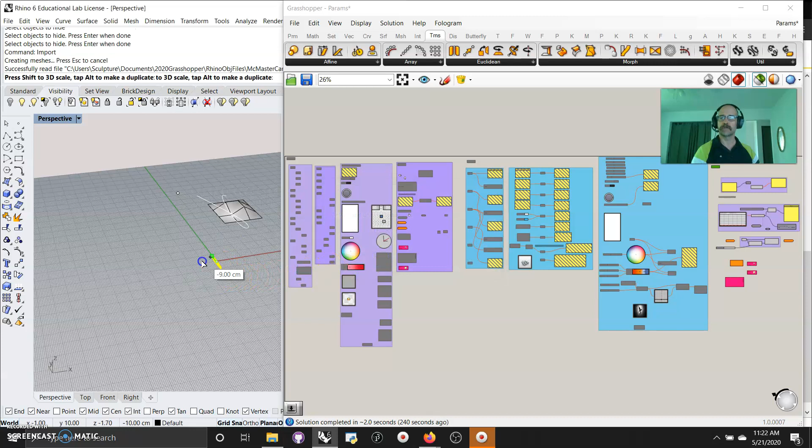Go to product details, scroll down to the bottom, save as a 3D step file, and there you go. It's in your downloads. Once you're done, jump into Rhino, go into import, and import whatever you feel like. I could grab that hex nut and load it in, and it should pop in here. Oh, it's a big one - hopefully no issues with it. Yeah, it's a tiny one. I'll have to stretch and make it bigger, and there we go.

Got a great piece of geometry that's made for you. You don't have to make it yourself. It's going to save you tons of time. If you haven't seen that tip, I don't know where you've been, because it's been pretty cool.

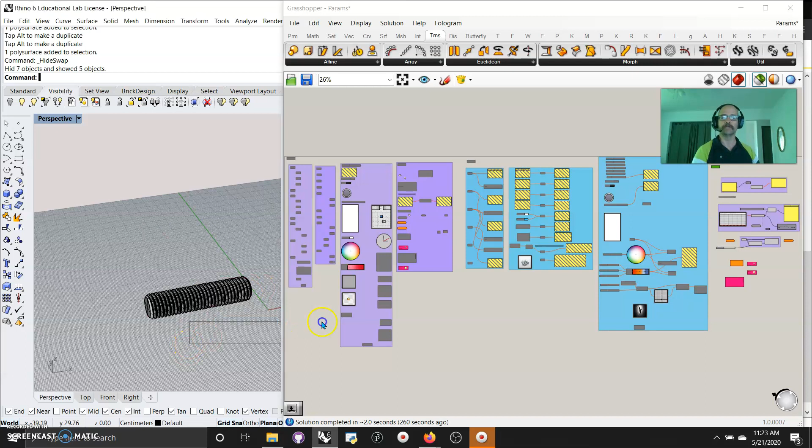That's there, that's fine. I'm going to take that one and swap it out for the one I had hidden. And there it is - that's the one I loaded in before. I've actually got that imported in as a boundary representation for this quick demo. Anyhow, I've got my param shirt on. I'm just about done with this. I thought this would be more interesting than bringing in a cube.

Let's take a look at these last ones in the utilities - I've pulled up the ones I find most interesting. Let me slide this around here. We're going to take a look at everything on the right. For some reason I didn't do these little quickies, so I'm interested why I didn't do those. Let me grab those two, and maybe I'll do those spontaneously while we're waiting.

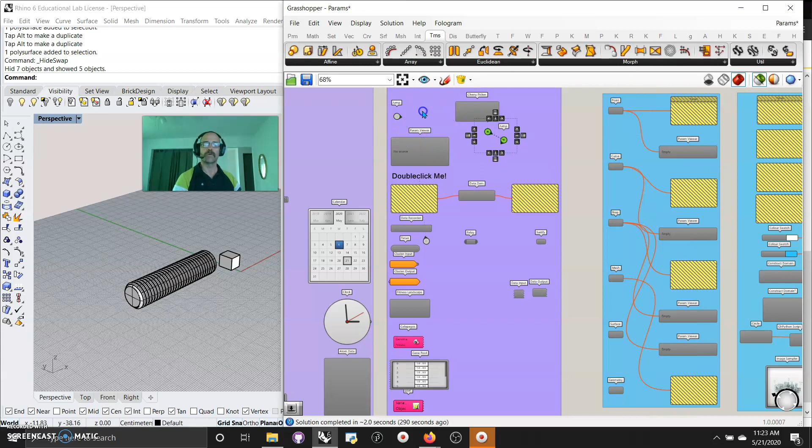Actually, that's the trick - they don't want to move because they're locators. So let's just get started, and before I forget, let's go over to these files and show how they can be used. Go into utility - one thing you might want to do is make sure you're in params utility and grab the jump tool, pop it in here.

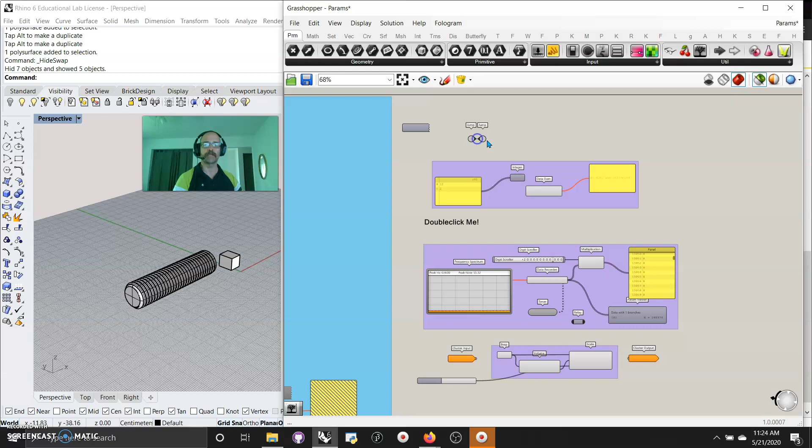Great little tool for locating things. So let's say I wanted to know that param... oh my gosh, panel goes to this panel. That way I can always locate it. So if it was off the page and I double click that, it should jump over and show me where it's connected.

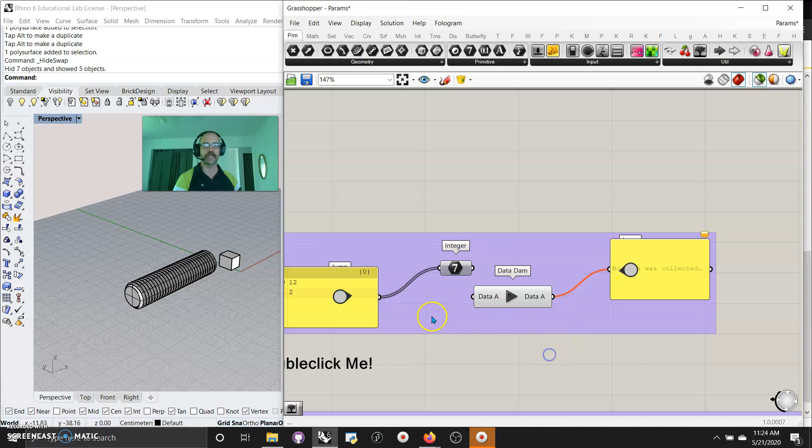Great little tool for connecting you up - if you like building model train sets, that's a great way to get from one tool to the next. So what I brought in here was a data dam. The way they work is I've put down a panel with an integer, and I'm going to plug that in.

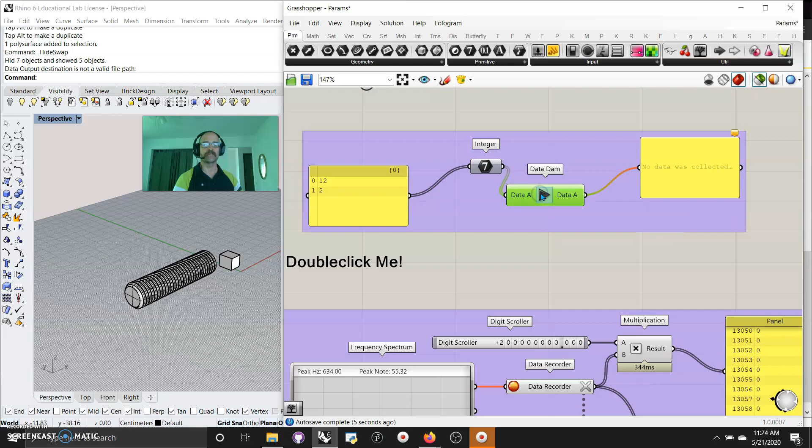The data dam is going to, when I activate it - double click it - send the data through. So it's sending that data. That's pretty simple. A nice little tool here just says double click me, and you might say, well, what is that?

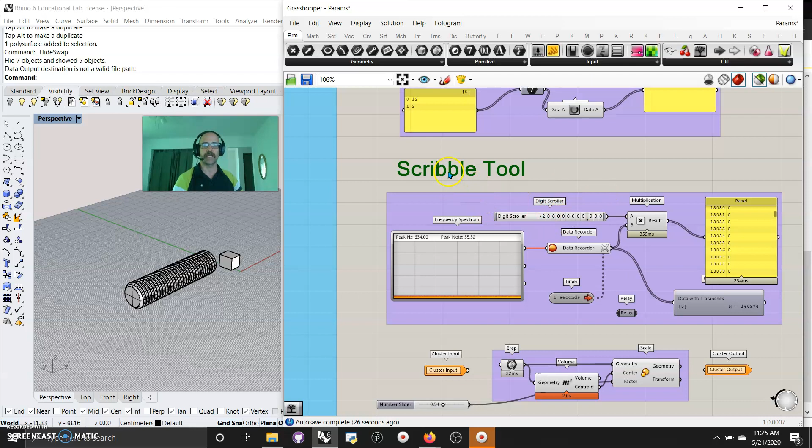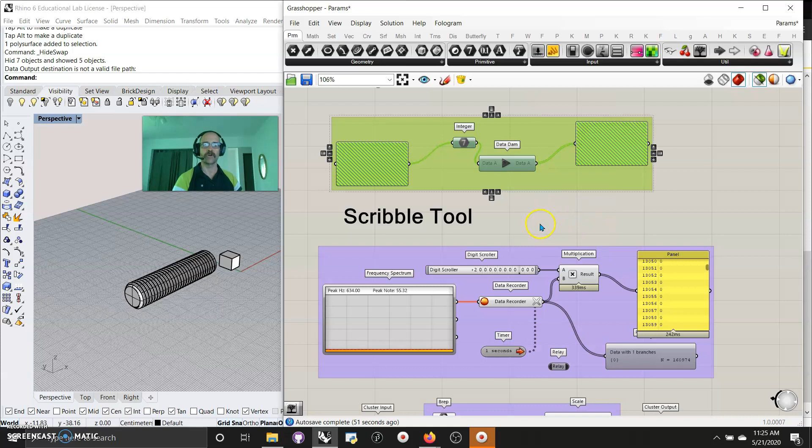But since that's not what I'm doing, I'm going to go back and leave it outside there. It's wonderful - you can just quickly drag it, tap Alt, and you've got another version of it. I'm probably going to disable things as I go, since I've got so many crazy nodes up here, trying to cover the entire params tab in about 20 minutes total of video.

Anyhow, what we have here is a data recorder - you're going to need a timer for that, and I thought those were interesting. So what I did was take it off being activated, but I had to go into the Firefly plugin and get a couple of things like this - otherwise it was impossible. I'm going to enable everything, and now you can see it's recording my voice, sending it through a data recorder.

I've multiplied it, and I used the digit scroller so I could amplify it. So as I'm talking, you're getting numbers averaging between 0 and 2,000 or 10,000. Well, that can be used for geometries. You can see we're dealing in 165 units. I'm recording every 1 second.

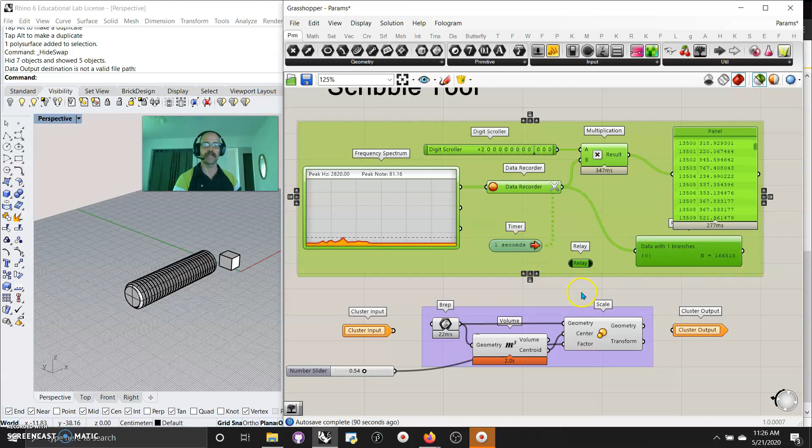Another thing I've got in here is a little relay. I didn't mean to include it in that grouped thing, and I don't think it actually is. Oh, it is. So just a little practice here: take it and ungroup that. I ungroup the whole thing, but it gives me my relay. What's nice about the relay is you can use it to make it appear, just like here.

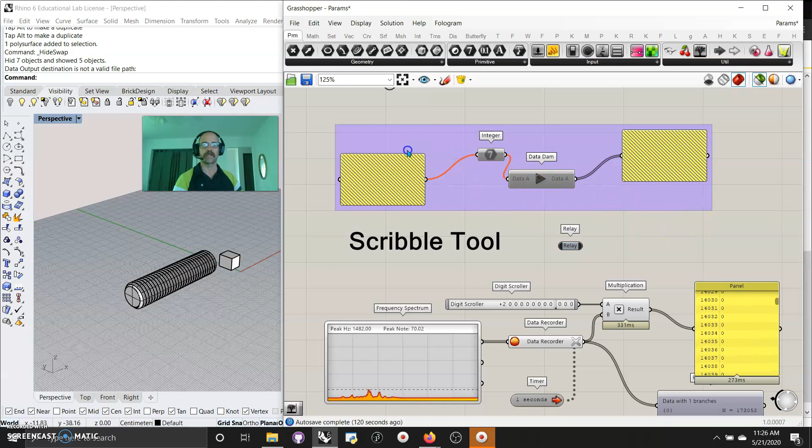I'll just show you here. These numbers coming out, which are a lot, I can double click that wire and pull in a relay for it. And there it is. Then I'm able to draw out a wire and take that to wherever I have to afterwards. So relays are pretty cool.

That said, we've got a lot going on here. I'm trying to keep these videos short, and you can see how slow everything's gotten on my computer, even though I have a pretty good Alienware computer from school. Let's disable that, and that'll be gone.

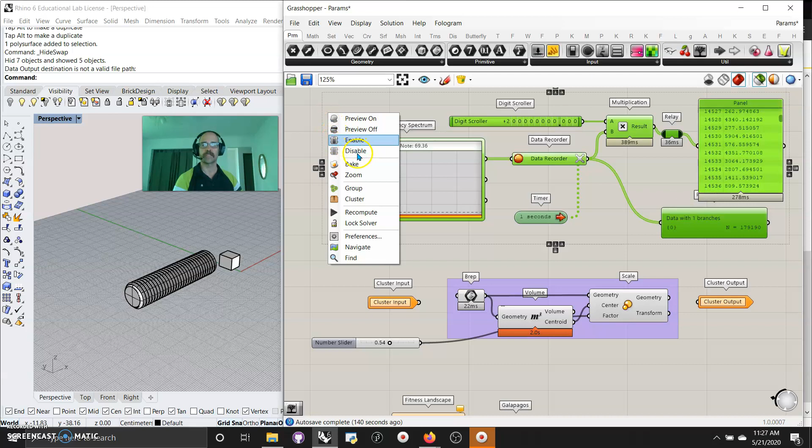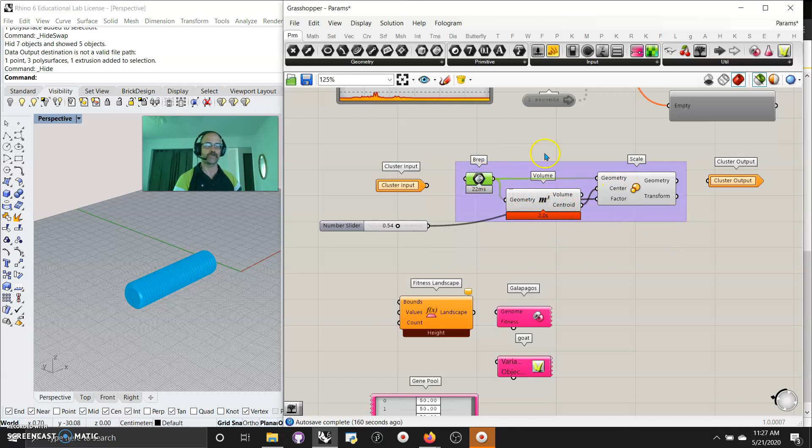Then what I have here is a way to make clusters. So there's this cluster input and output, and what I did was I actually grabbed a brep, that boundary representation, so we can take all these now, put them in the hiding, and there's that image. I wrote a little script, very tiny script, taking a volume, locating the centroid - and of course these aren't the nodes, I'm looking at the clusters.

What's nice about this is then you have a geometry that scales it, makes it smaller. So that's a little tool using the scale tool, but it also takes a brep, finds the centroid, and scales it to that centroid.

There's a number slider here, which means I need multiple inputs. So I'm going to take this input and plug it in here, and it becomes a brep. I can go back up and grab another input, and plug that in where my factor went. You can see how that works.

Then I can take my cluster and have the output geometry. What's nice is I select everything in here, and I scroll click my button, and I have this option to cluster. And there you go - I made a node out of all that.

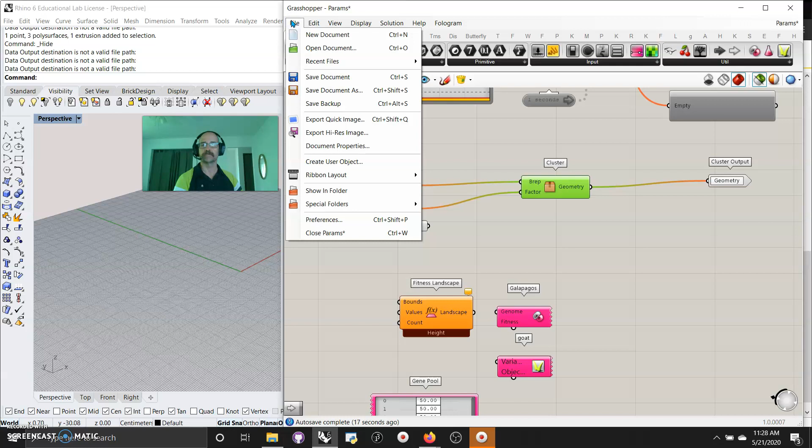Now this thing, you can go farther into File, and you can - I believe it's called, I might have to have that clicked - create user objects, which I'm not going to do for this one, but you double click on here, and there's quite a few details, and I would say watch a tutorial on that, just like the Firefly.

You're going to want to watch tutorials on that. You get this set, and there's your little tiny cluster that goes in, and you can click and save that, and you can put it places.

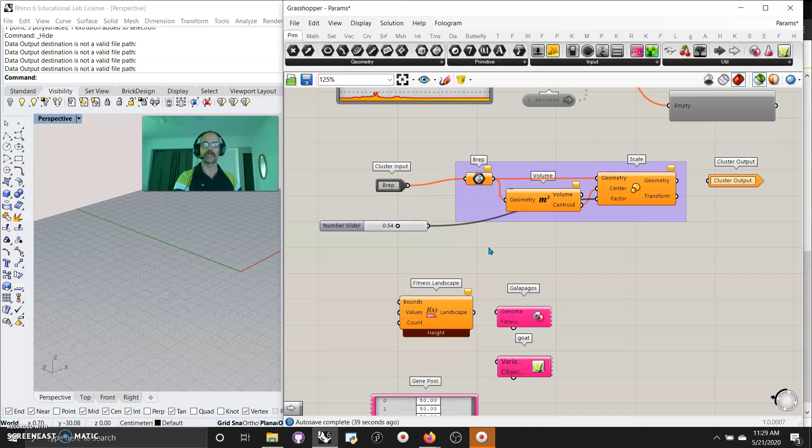I think I will go back just in a sense of seeing what formula was there, and I might take it back before I actually clustered in the inputs and the output. So let me do that, and we'll just bring that back to what it was. There we go - I might have went back too far.

The other thing I wanted to show was this GOAT program plugin that I had before, in this Galapagos. These are optimization things that use fitness landscapes.

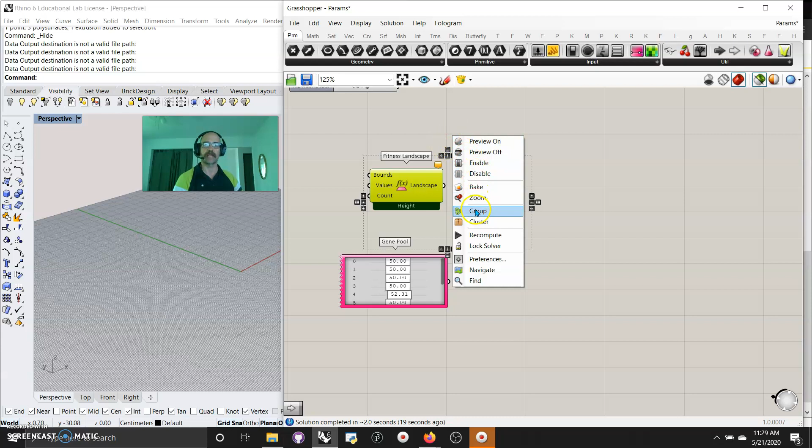You're going to definitely want to go into tutorials on that, which I'll do at a later date, to learn about optimization for things like hanging weights and tensions and all that, and building geometries that are much more organically built - in my opinion, certainly optimized.

The last tool I want to bring in, which is one of my favorites, is a gene pool. Of course it has its problems, but it's a really nice thing because you can have as many number sliders as you want in a gene pool, and you can use this tool for incredible things.

My favorite thing to do with it is you can right click and edit, and you can go down and maybe make this gene count.

We'll just do 5 in the gene pool, and we're going to make that range from 0 to 1 to start, with 2 decimal places. Not essential, but basically that's going to reset the gene pool.

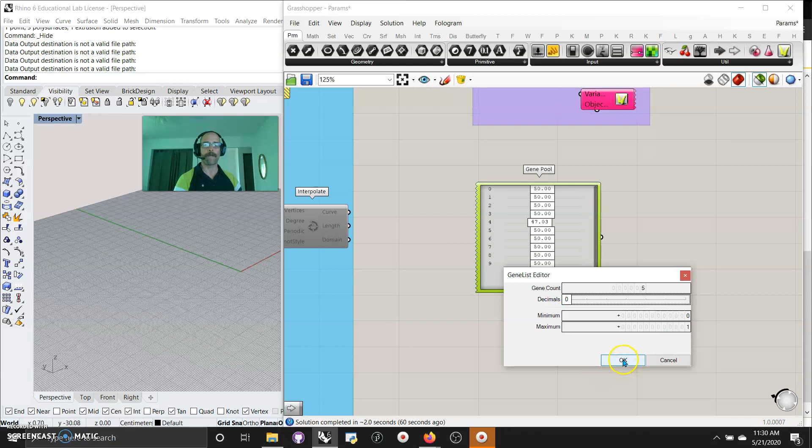You can right click on it, you can randomize it, you can also play off of the data coming out of there. This has gotten a little slow, so let me just double click it. I do want a couple of decimals.

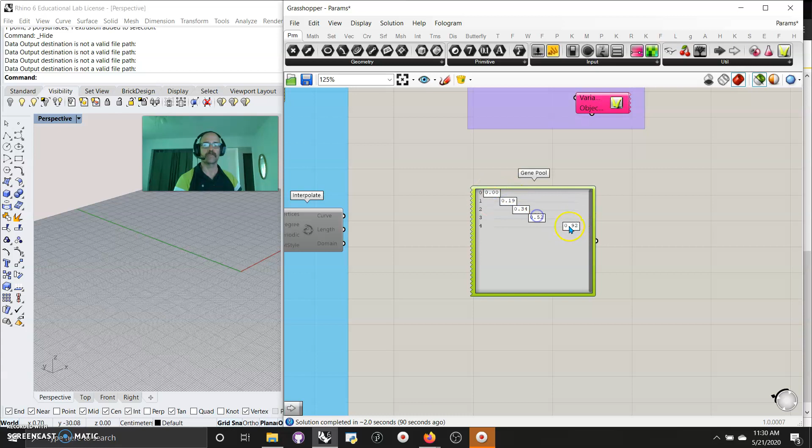Say I wanted to move through a line and have many points on it, points on curve from 0 to 1. That would allow me to have a number slider in reference to points on curve. You could go into something like a variable.

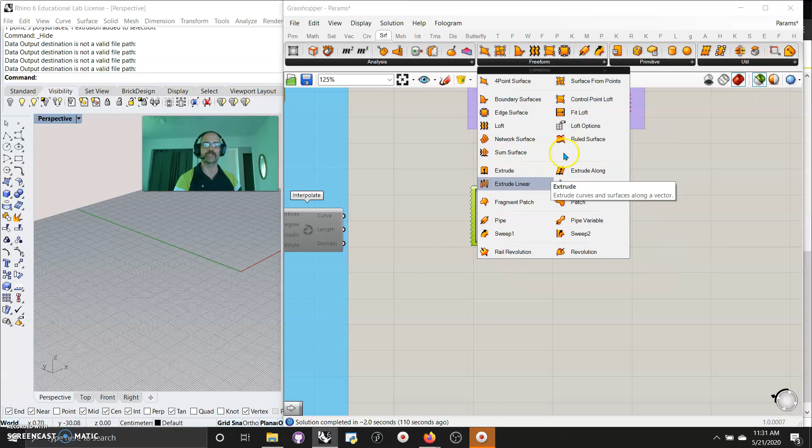I'm not going to get too far into the surface tools, but I'll use an example here of variable pipe, an interesting take on piping lines. I try to keep all this to minimal surfaces so my files stay running pretty fast. Variable pipe is pretty cool because you can grab a curve, so we would just locate one in our window.

We could then set up our parameters 0 to 1, and as long as you have the same amount of numbers, you can change this, and this could be the radii at different pipes. So you could pipe that curve, and as long as your number of gene pool radii matches your parameters, you can make a pretty interesting pipe. Just an example of that for fun.

Why not? Grab it, bring that in, reference that as one curve, and now we should be able to see a geometry piped. Of course these numbers are so small, it's just taking a minute to register, I believe.

It is piped. They're so tiny you can't even see them, but there is a piped little curve there. At least I believe there is. Set one curve. Yeah, that's it. Let me get rid of that one.

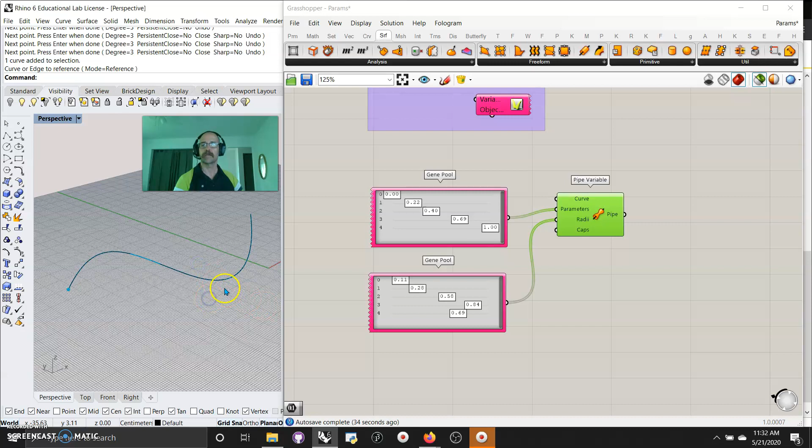What I may want to do is bring up my edit count, bring this up to maybe 10 as a maximum, and then I can hopefully see that pipe. Oh, one thing I've done that I forgot to tell you, which is so essential, is I reparameterized this curve from 0 to 1. And in doing so, there you go.

You got a pretty simple, interesting, controllable, organic geometry that's set, and if you start shifting these, you'll start to see some really weird geometries that overlap and push and pull one another. So that can be kind of fun to change up. Anyhow, nice little tool, the gene pool.

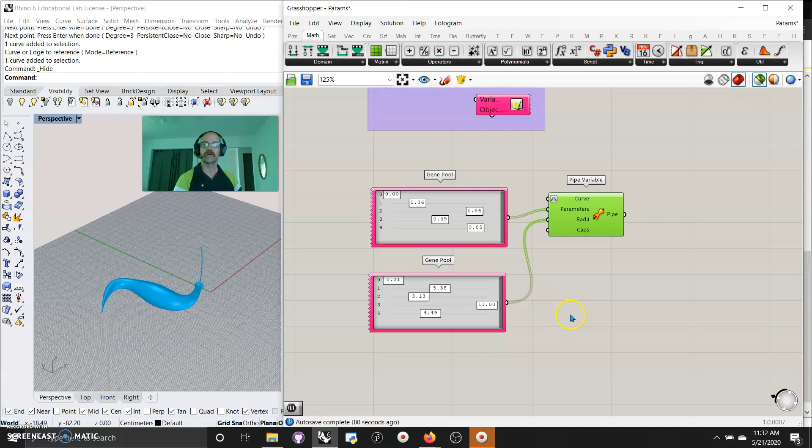I'll start showing more and more examples. We're about ready to go into maths. I'm going to change my shirt, and we're going to go right through domains, through utility, which is going to be a much larger program than this. Hopefully in under an hour, we covered everything with basic params.

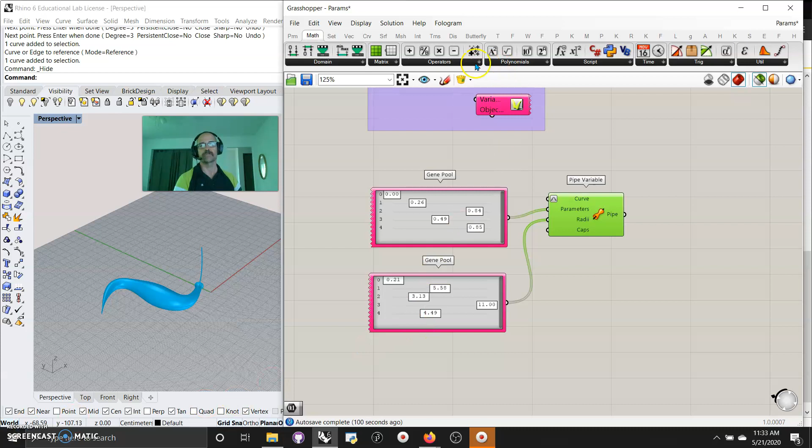Basically, I'm doing this because I teach, and with COVID-19, I've got to start putting things online for my own students, and I've got to get some basics down if I'm going to move people from CAD and learning 3D programs into anything algorithmic or computational. Grasshopper is absolutely fantastic. You can see what we did here in this video series.

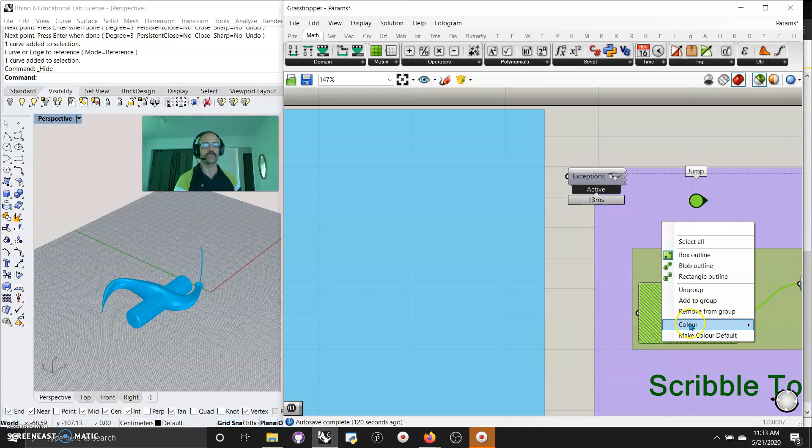Here it is, and I'm just going to basically grab it along with those little tiny jump tools, if you remember those. I'm going to group that. I'm going to grab my color that I like so well, turn it to a nice blue. I'm trying to keep my fingers straight. I'm getting too old. And there we go. And my bifocals plug in.

And there we go. I think we've had a pretty good series of what to do with params. I'm stretching this out because I feel pretty good about myself doing this. Everything covered, every param that's listed, and every one that I actually come to use and use often enough that I think it's worth practicing every day.

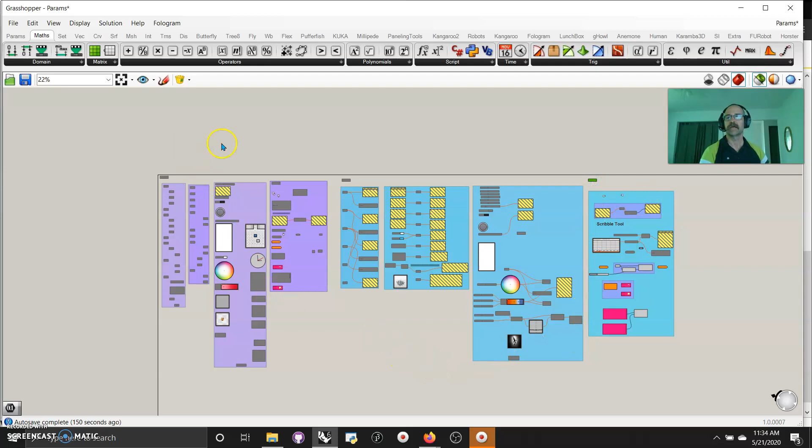Remember, you don't play and practice the piano, you play the piano. It's one and the same. Or you practice the piano, it's one and the same. Same thing you have to do with this to learn this tool. Thank you very much for watching.